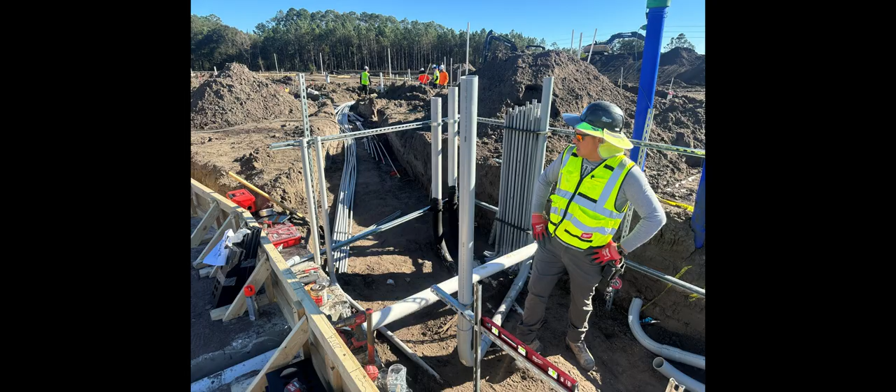All right, before we get started, I want to do a quick video explaining how important it is to develop a conduit and wiring schedule, just to build some context around the examples I'm going to give, so you'll better understand what we're talking about and how it can greatly benefit you productively and efficiently on the project. We're going to go over a couple of things. I'm not going to make this video too long. I'll cover the basics, and then we'll get into the presentation right after this.

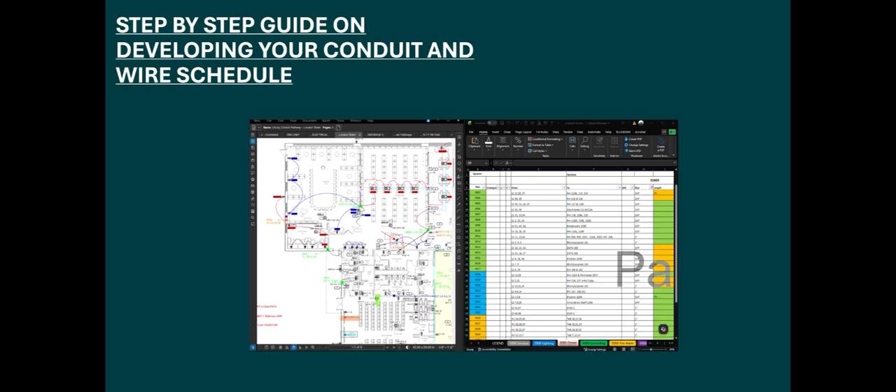So this will be your step-by-step guide on developing your conduit and wire schedule. As you can see, here's a quick shot of how it's going to look: the drawings that are set up on Bluebeam, also used in Excel.

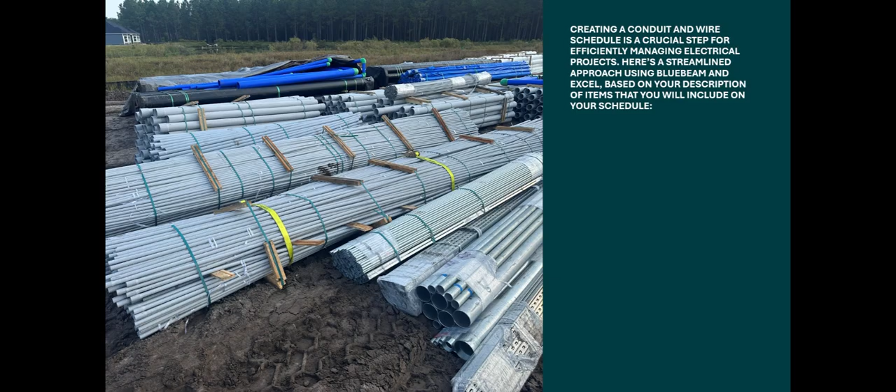All right. Creating a conduit and wire schedule is a crucial step for efficiently managing an electrical project. Here's a streamlined approach using Bluebeam and Excel based on your description of the items that you will include on your schedule. So a couple of things we're going to talk about. Obviously, you want to get your drawings together. You need to have Bluebeam. It's a great tool, or you can even use Adobe if you want, but Bluebeam is way better.

We're going to create your Excel spreadsheet based on the items that we're going to talk about. Then we're going to input that data, calculate distance and wire size. This will help us track inventory, and you will understand here in a little bit why that is very, very important. And then you can review and adjust as needed. You see things coming up, things change. You can go back to your sheet, change a few things if you need to based on the conditions of the site or the activity that you're performing. And then we're also going to discuss briefly the benefits of this system.

So obviously first you want to get all your drawings together. Ensure that you have all relevant electrical drawings readily available. This includes plans detailing conduit runs, panel location, and circuit specification. Additionally, consider including the architectural drawings for the floor plan and the reflected ceiling plan to provide a comprehensive overview of the project. This is very important.

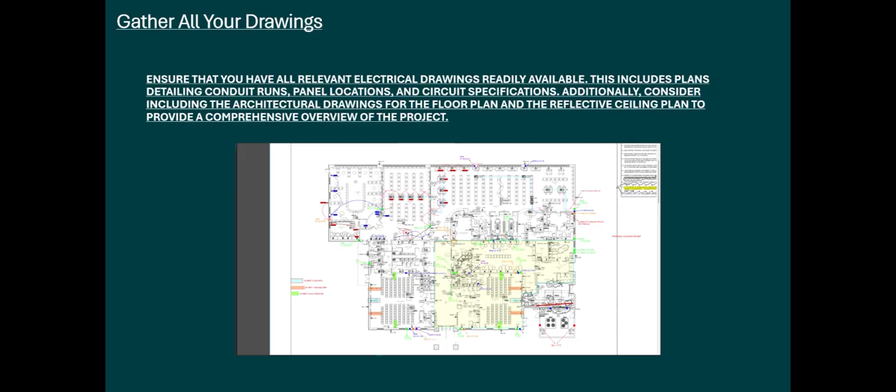This also helps you study the drawings even more, understanding where you're going to be stubbing up at, understanding what size of the wall, if it's a 3 5/8, if it's a hat channel wall. You'll know these things because you've already gone through your electrical drawings to see your stub ups and where they're going to go, and you can understand exactly what you're working with way ahead of the project or this activity being started, if you have the time when you first get out there, and hopefully you will have the time.

So obviously we want to set up Bluebeam for markups. Here's an example of the drawing that I'm going to be using, and I'll zoom in later on the video, where I started doing my layout for my feeders. So you want to open the drawings, load your electrical drawings in Bluebeam like we talked about, and you'll have all these tools on the side, plus there's some additional tools here. This is just a snippet that I pulled from a screenshot I was doing.

And I will do a video on Bluebeam to show some of the newer guys who don't have any experience with Bluebeam or Excel, just starting out. I get it. It's very, very easy. It's very user-friendly, and it'll definitely save you a lot of time.

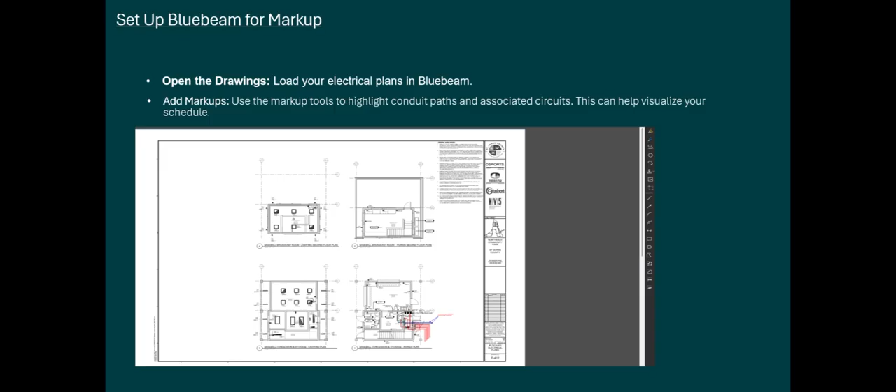And then obviously we're going to add our markups using the markup tool to highlight conduit paths and associated circuits. This can help you visualize your schedule. So you can look at a drawing, you can see a bird's eye view, then you can go to your conduit locator sheet and be like, okay, I need to pull this. I don't have this pulled yet. I don't have this run yet. And it will help you a lot.

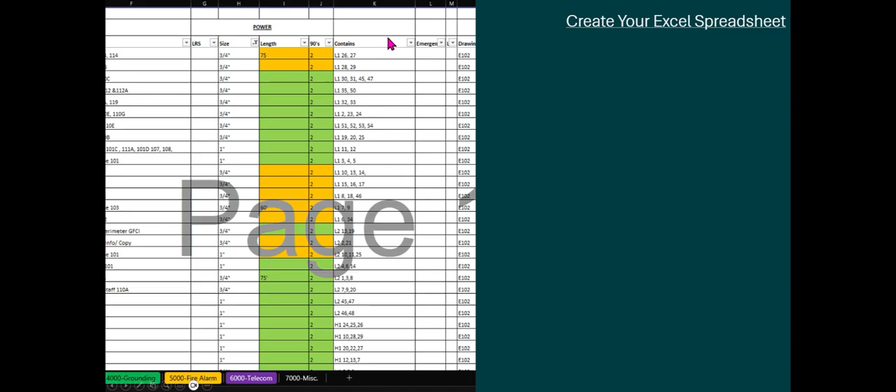Next thing we're going to talk about, creating your Excel spreadsheet. This is an example, another snapshot of a conduit locator sheet where we'll have our descriptions here. We'll have our conduit size. And obviously I'm still working on this one because I don't have all the lengths plugged in yet, but you get the idea. And then you have your circuits and what panel they're coming out of. Great, great tool to use when you're setting up for underground.

And some of the things you want to include in your column setup are conduit number, circuit number, estimated distance, wire size, panel destination. And you probably want to include a status for when you get ready to pull wire: I either pulled this wire or haven't. This will help you check everything off to make sure that you have everything accounted for. And also you want to add a section if you want for location notes or any other notes that are not listed here. Obviously, you can do it how you want to.

And a great thing about Excel is that you can filter through it. You could say, okay, I just want to pull everything that's in L1 right now, or I just want to run the conduit just for L1 right now without having the whole conduit locator sheet open. You can filter it down. That is an awesome feature that Excel has for those who haven't used Excel.

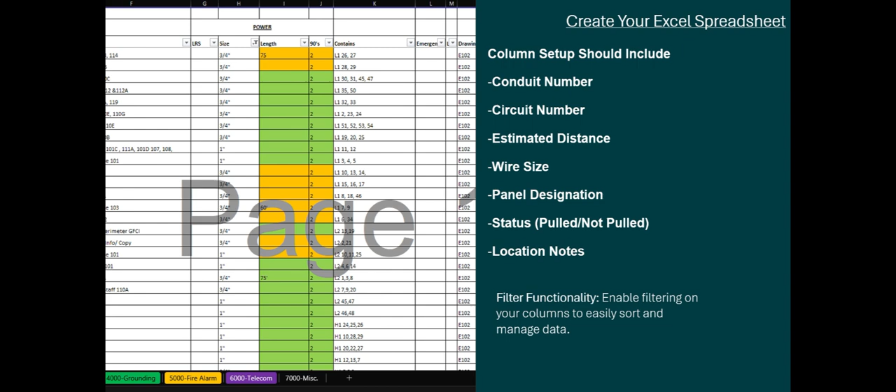Those who are experts or novices at Excel know how important that filter and sort tool is. All right, moving on. Obviously, you want to start inputting your data when you get that information. Go through your markup drawings and input the details for each conduit and wire run into your spreadsheet. Assign a unique number system for each conduit that follows a logical sequence.

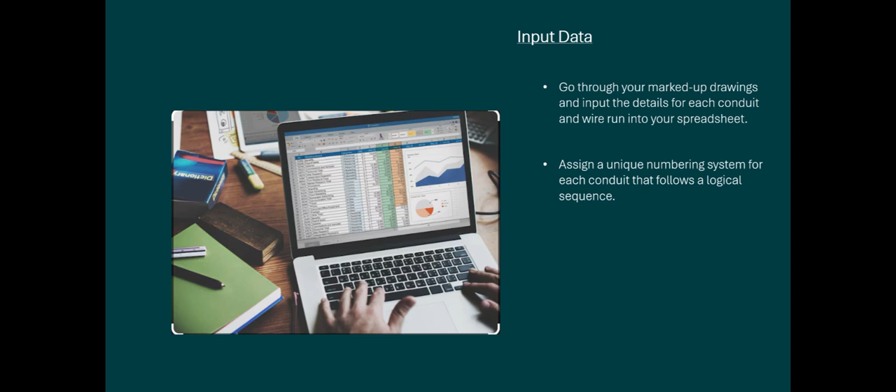I'm going to show you guys how I use the 3000 section of the numbers, 3000, to highlight power. I think I use 2000 for lighting. So it will make sense later on. That's why I want to cover some of these bullet points before we get into it, so you're not totally lost, and also to build context around what we're trying to accomplish here.

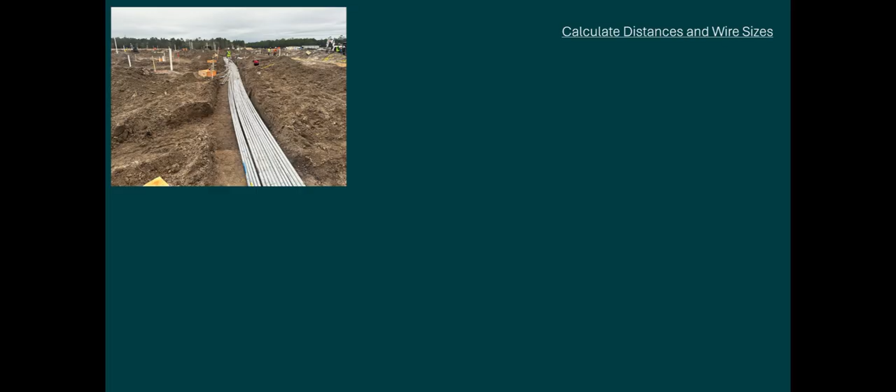All right, calculating distance and wire size, another wonderful thing that you can have. So you have 18 runs of 1 inch, you total it up, it's 5,000 feet. Boom. You're going to need 5,000 feet of conduit out there. So you might as well go ahead and get that located close to where the guys are working, have that ready, and all the other associated materials.

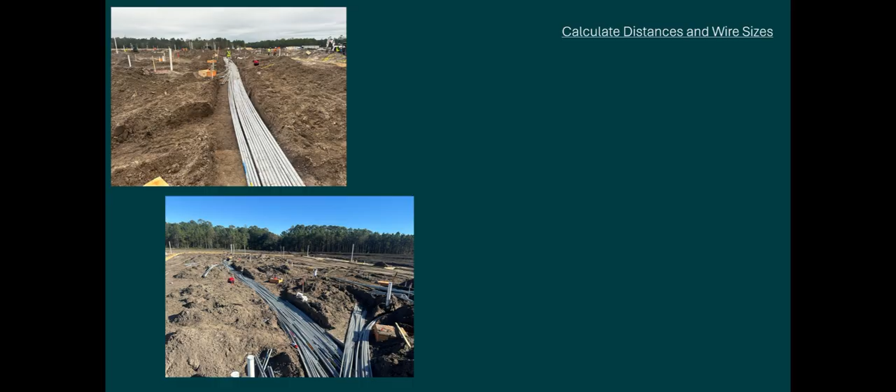That way you don't have to sit there and bring 2 or 3 bundles of 1,000-foot pipe that you may or may not need. So this will help you control your inventory a little bit, control what you got going on out there, and that way you don't have too much material in one location or not enough material. So that's why that filter key is very important.

So you want to estimate your distance based on your drawings using the Bluebeam measurement tool to aid in this. Yes, Bluebeam does have a measuring tool where you can click from one point to another point and it'll give you the distance. Obviously, you got to calibrate it. And again, I'll show you guys when I do that video how that all works if you haven't used Bluebeam before.

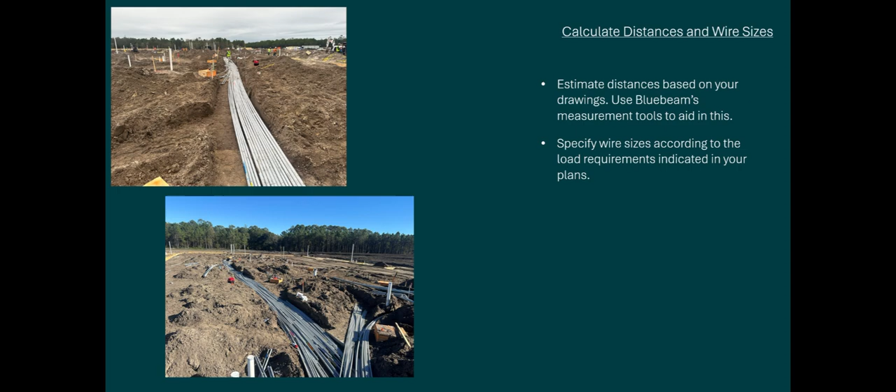Specify wire sizes according to the load requirements indicated in your plans. Some of those runs may be longer, so you may need bigger wire, number 8 instead of number 10, or number 10 instead of number 12, or whatever that may be. You'll know exactly what you need, so you guys can look at that schedule and be like, okay, we need to pull number 8 over here to this HVAC unit, for example.

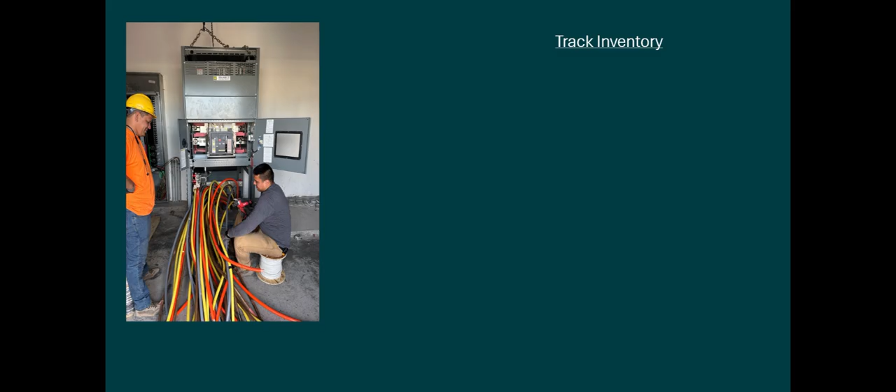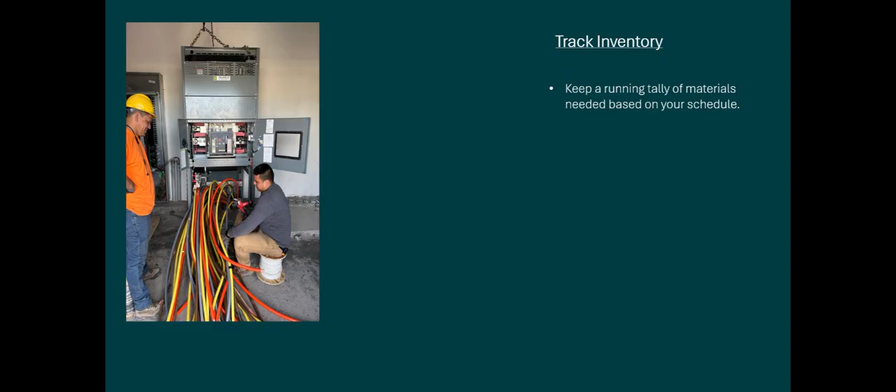I know I mentioned earlier about tracking inventory. This tool, the Conduit Locator Sheet, dealing with all the material associated with it, will help you track your inventory to make sure you have enough pipe. There's nothing worse than running out of material when you're 80% done and you have to wait on the supply truck. That's the worst thing. So planning is very important. Staying ahead of the game.

Just like with anything, as much time as you put into it is what you're going to get out of it. If you put a lot of time in it in the beginning and you're really putting your best foot forward, this will help you. If you're just going to be like, oh, well, I'll go with the flow, then you're going to run into problems. So you want to update your spreadsheet as materials are purchased or installed.

Now, earlier we talked about the benefits of this system, and I think we covered some of them during the course of this presentation. But I really want to just stress increased efficiency. This systematic approach saves time and reduces the risk of errors in inventory management.

It also reduces the risk of you missing something that you didn't catch because you didn't do the Conduit Locator Sheet. You're going to make mistakes. It's going to happen, but you want to minimize those mistakes. Just remember, every time you got to go back and redo something, it costs money. So you don't want to be a liability.

This also enhances blueprint reading. Using this method improves your ability to read and interpret electrical drawings, as well as architectural, civil, hardscape, reflected ceiling. All those drawings you have to consider when you're doing electrical work. We got electrical devices and components in every aspect of the job, everywhere. So the more you know about the job in reference to the drawings and what is being installed by other contractors, the better you are at finding problems and preventing them from ever happening.

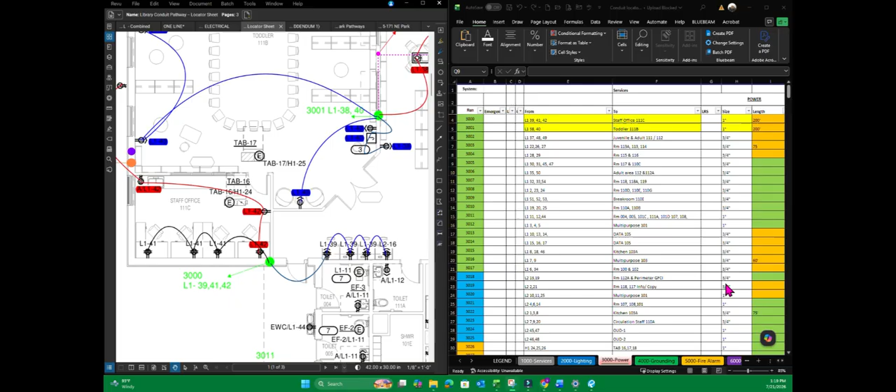All right, here we go, as promised. So what you're looking at right now, on the left here, are the electrical drawings that I've gone through, and I've added where I want my stub ups to land. I actually do the end wall here too, but that's for a later discussion. We're just going to strictly focus on the conduit locator sheet and your underground branch circuits going out to the location that you decide you want to stub them up at.

So for an example, down on my legend I have different designations for different stub ups. In this particular case, I'm using 3000 as my power. So anything with the 3000 or 30 is going to be my power, for my underground branch circuit. Remember how I was telling you earlier, if you do this ahead of time, you can see how many home runs you have, and you can plan for that throughout the whole job, throughout the whole building.

But we're going to take this for an example so I can give you the meat and potatoes of why this is important, why this can help you, and why this is a very easy thing to lay out. You can use this strategy, and if you miss anything, you can go back and correct it. So here we are with 3000. We have where it's coming from, L1, 39, 41, 42. And as you can see over here on the electrical drawings, we have 39, 41, and 42. So we know we want to stub up in this wall. Also, we have 1-inch conduit, and it's approximately 200 feet from the panel.

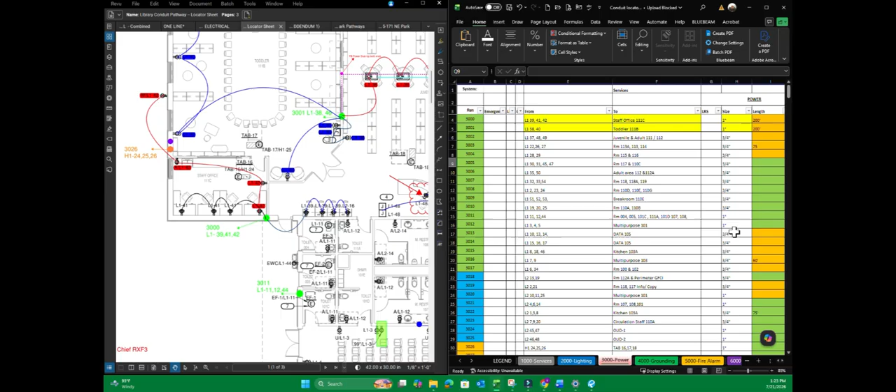Now, you may not catch everything, but at least you have a starting point and a reference by doing this conduit locator sheet. It's a great tool to use. And again, you could give this to a third-year apprentice, maybe a helper. You can say, hey man, here's the drawing, here's all the designations. They don't even really need to know what circuits need to go in there yet. That's for you when you get your wire pulling crew out there. But just laying out the conduit and saying, hey man, stub it here.

One of the most important things you would need to do is go out there and lay out the walls. You throw some mason string up, put some tape on that string and tell them, that's 3000, 3001, 3002. This is where all this is going to stub up at. However you want to do it. But at least you have a baseline to go off of, how you can hand it off to your guys in the field, and how you could take that same list with your iPad and go back and check each location to make sure that the pipes are there. Because if you did a thorough assessment of what you need, you don't even have to worry about the wire yet.

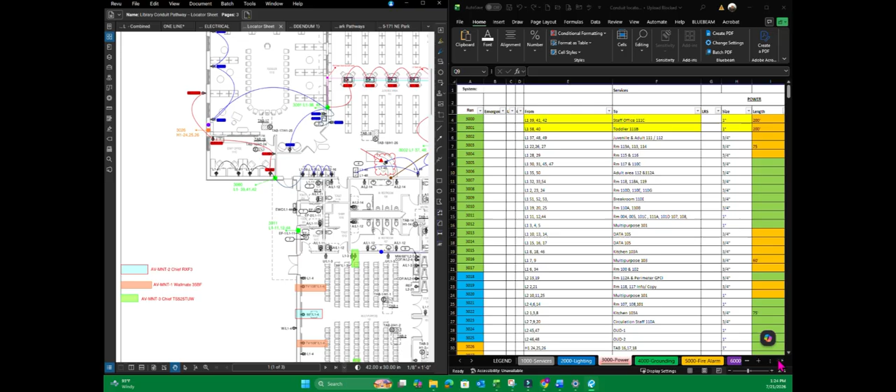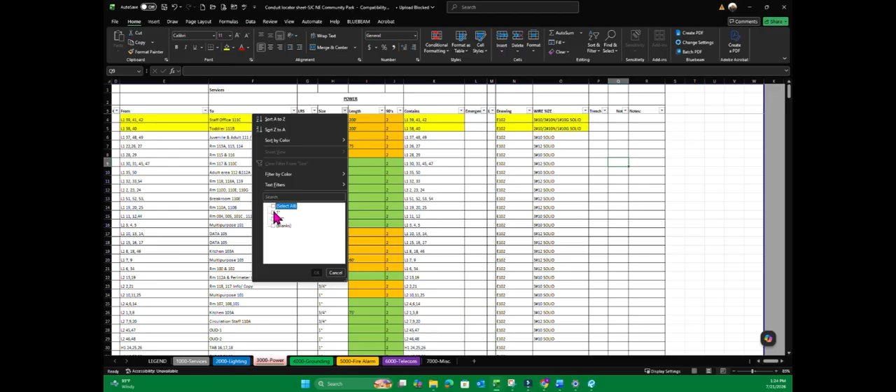You just got to worry about getting the conduit stubbed up in the right place. So yes, this right here is a great tool to use. Like I mentioned earlier, it also allows you to see, when you filter this out, let's go ahead and blow this up, how much footage do I need? Well, you can go here, click that, and once you get all your lengths established, you've got all the footage that you're going to need for that area once you put all your lengths in.

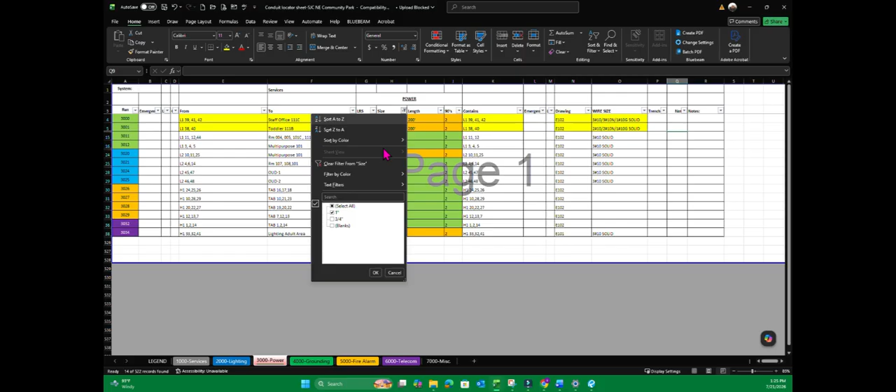So you can say, well, I need 3,000 feet, 2,000 feet of footage. You can have that already sitting on the side, ready to go, especially if you're doing a slab of this size, which is not really big. It's probably going to get poured in one shot. You want to do 3/4, you filter it out, you see how much 3/4 you're going to need, and boom, you can have all that ready to go for your guys. And in the future, when all the rough-in gets ready, you can see how much wire you're going to need as well.

So again, I'm combing through this right now. I'm still working on it. I thought it would be a great opportunity to do a quick video on using Excel, whether you want to call it a conduit locator sheet, a conduit wire schedule, whatever it is. Like I mentioned earlier, this is nothing new. Old school guys used to do this by hand. Believe it or not. So nothing that I came up with. I've just seen it over the years doing electrical work, and I thought it's a great tool for guys starting out. It helped me a lot when I was doing underground.

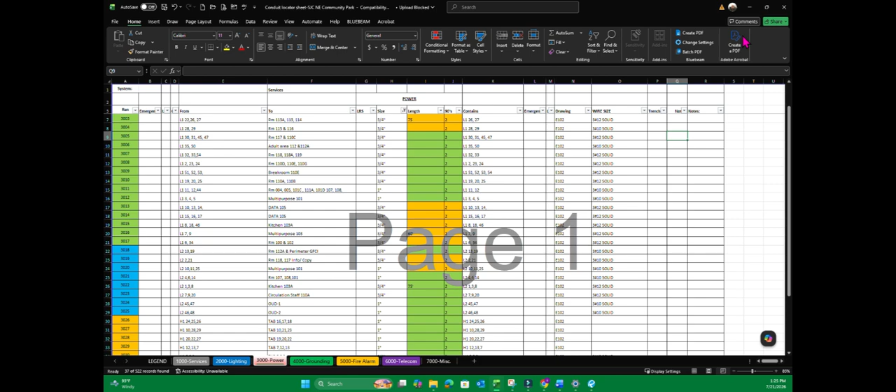And when you get Bluebeam, if you're not familiar with it, I advise you to try to get it and practice with it. It's a great thing. Especially when we're dealing with floor boxes, I like to draw in where I want my pipe to go. For example, I've got floor boxes here. I want to tie those floor boxes together, stub up in this wall, and I also have a stub up coming up in this wall here. So I have two ways to get to the floor box if a pipe gets damaged, gets clogged, whatever the case may be.

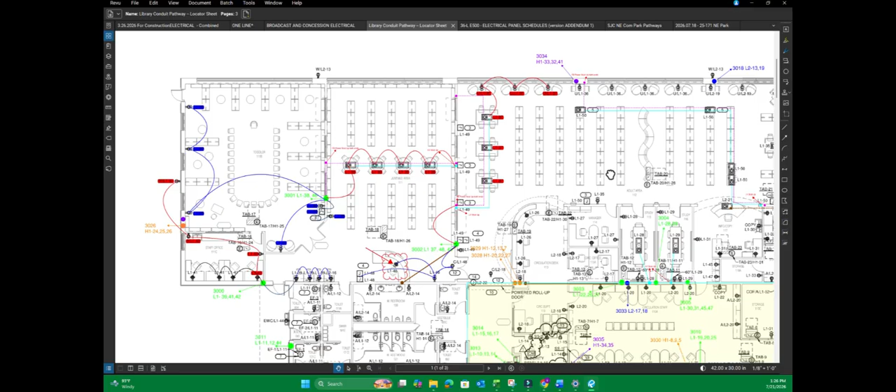Doing this for a while, you learn little tricks of the trade, like let me add another 20 feet of conduit, because I've had this problem before where I've tied all my floor boxes in and then I get to the last two and I can't get to them because it's blocked or it got broken. So this is a good little tool, and I'll probably do another video on the basics of Bluebeam, how you get these lines to do what they do, and how you get the arc in the lines, because it's a very good tool when you're designing and coming up with your circuitry.

We used to do this back in the day by hand with stencils. Definitely the times have changed and made it a lot easier to do these layouts and use different colors, maybe one panel red, another panel green, so you can get a bird's eye view of your drawings. And when you pass it on, the guys don't get confused with a bunch of lines running everywhere that are the same color. Anyway, I just thought I'd share that since I'm in the middle of working on it. I'm almost done, making some changes. It's a great tool, and I encourage anybody to use it; it makes your job a whole lot easier.